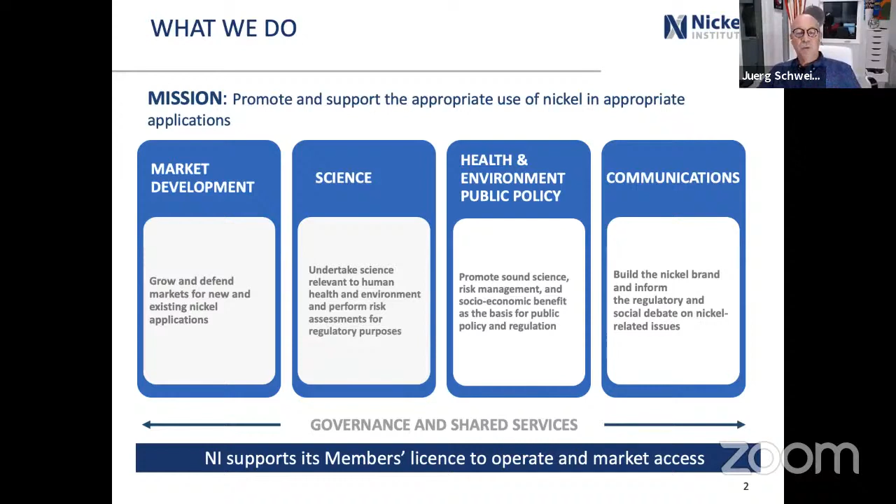At the end, we have the communications team. They are very important to build the nickel brand and to inform the relevant associations and regulators with documents, papers, and brochures, as I will come to as well.

So, where are we located? Our headquarters sits in Toronto, Canada. Then we have the science division, NIPERA, in the US, sitting in Durham, North Carolina. Anything that goes into health, environment, and public policies is located in Brussels, that's the Europe headquarters. Then we have 2 non-profit incorporated offices, in Tokyo and one in China, and 2 representative offices, one in Singapore and one in Brisbane.

Who are our members? As I mentioned in the beginning, these are the leading nickel mining companies. This is who is contributing to the financial parts of the Nickel Institute so that we can do these free of charge webinars, as one you will hear tonight.

Important for everyone, and we've done this for many years, we promote technical help. You go onto our webpage, nickelinstitute.org, and you will immediately see a big yellow box, technical help. You click on it, go through a short registration process, and you can submit any technical questions you have around nickel, stainless steel, and so on. You will get free of charge information within 24, maximum 48 hours back from one of our experts. This is worldwide, take use of it, it would be great for everyone to use.

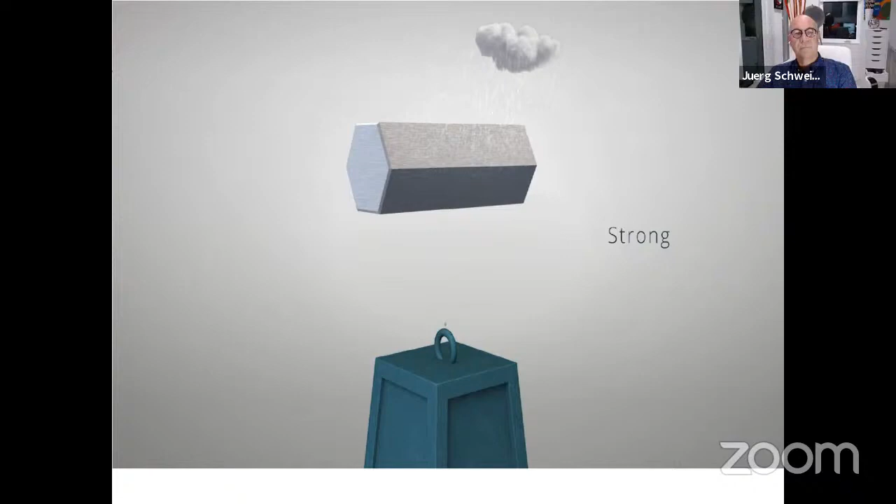For starters, it's the 5th most common element found on our planet. It's produced in more than 25 countries, and it's used in hundreds of thousands of everyday products. Without it, our modern world wouldn't function. But to most people, it's a complete unknown. So what is it that makes this extraordinary metal so special? It's resilient, strong, resistant to corrosion, highly ductile, with a super high melting point. Not to mention its useful magnetic and chemical properties. All in all, a pretty handy element.

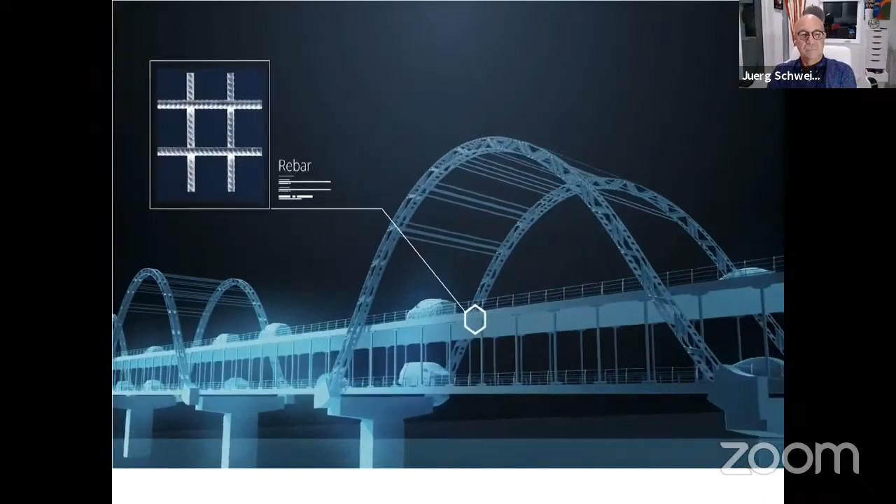But that's not everything. More than two-thirds of nickel produced is used to make stainless steel. This amazing alloy is used in everything from spoons to spaceships. Pretty impressive stuff. Nickel improves the strength of stainless steel and helps it cope with extreme temperatures and corrosive environments, while making it easy to use. It's the perfect partner for engineering and construction projects.

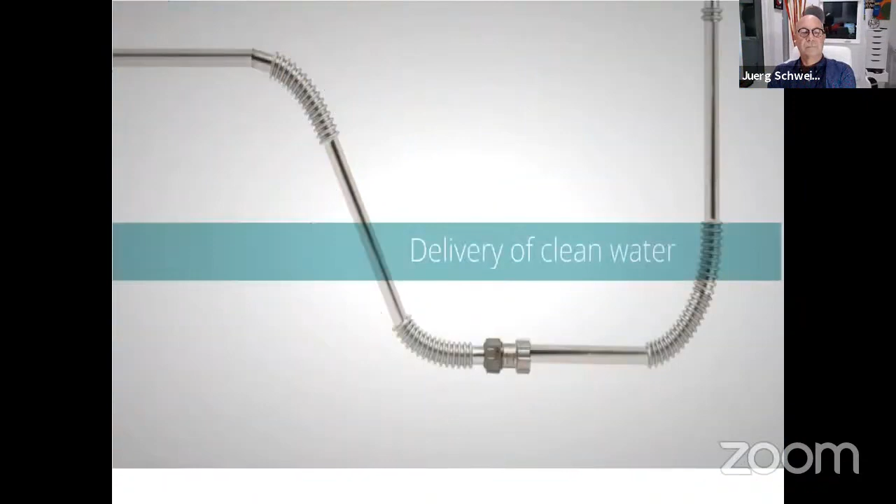The metal is also a key component in modern batteries, enhancing their energy density and helping to power the future of transportation. Nickel-containing materials are used to meet the demanding conditions of the oil and gas industries and other methods of power generation, including renewable energy. And those anti-corrosive properties help provide invaluable protection for a huge range of maritime applications. Nickel helps ensure the delivery of clean water. Being resistant to damage from earthquakes or extreme weather, the lifespan of pipes is extended and leakage is reduced.

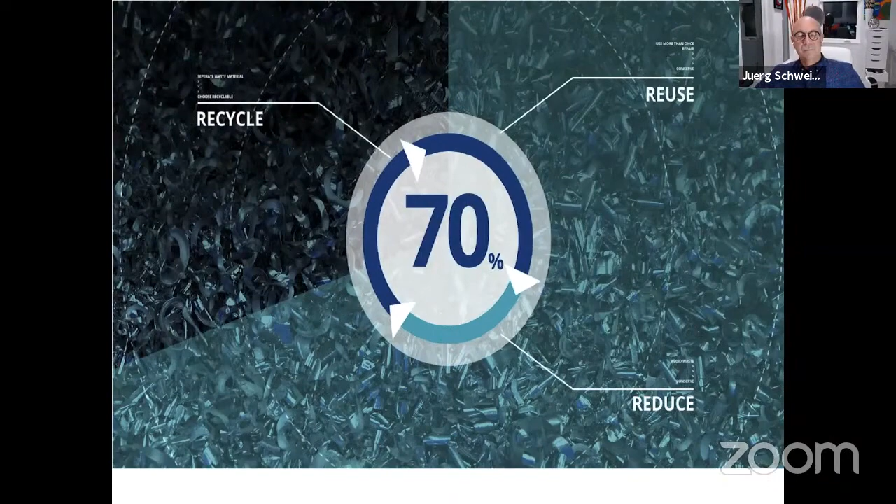And what about recycling? Nickel is one of the most efficient materials for reuse. Almost 70% of nickel is currently recycled again and again, contributing to a sustainable, circular economy. Nickel, the hidden metal that makes the modern world work, now and in the future. Pretty extraordinary, really.

Yeah, hope you enjoyed this short movie.

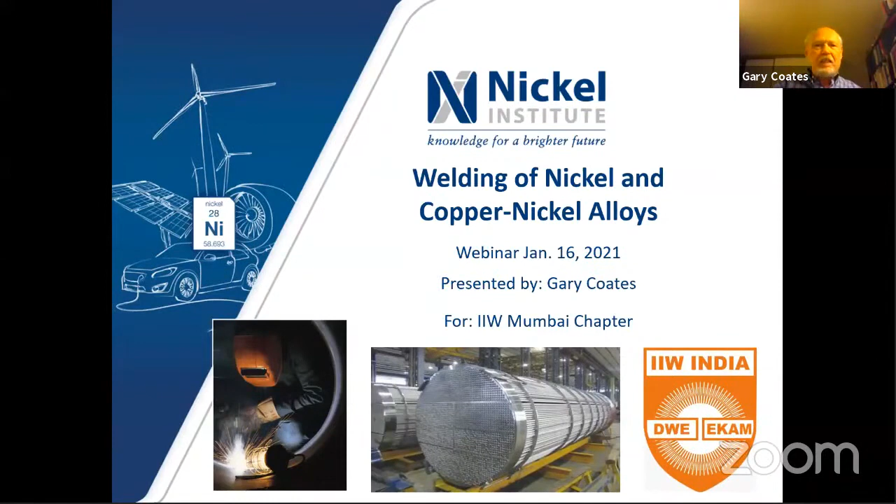Okay, so we're going to talk - I'm going to do a short introduction on nickel and copper nickel alloys, so we're all on the same page related to what kind of materials we're talking about. A section on before you weld, because if you don't have the material right, the welder, the welding engineer isn't going to be able to have it welded properly. And then of course, the bulk of the session is on the welding of these materials. A couple of slides on post-fabrication inspection and cleaning, and we have some very good references that you can look at, and a short summary, and then time for questions.

So one of the issues with nickel alloys is that they are used in conditions that are very severe, highly corrosive, maybe containing toxic, explosive, or flammable chemicals, and especially used at higher temperatures where stainless steels don't work. So we really need to take extra precautions to ensure there's no issues throughout their service life. That's for protection of the people in the plant, people in the surrounding communities, and of course the environment. Now this is not so much true for copper nickel alloys, they're used in more benign situations. We'll come into that shortly, but many of the nickel alloys are used in very severe environments, and they're expensive materials, so we want to do it right the first time.

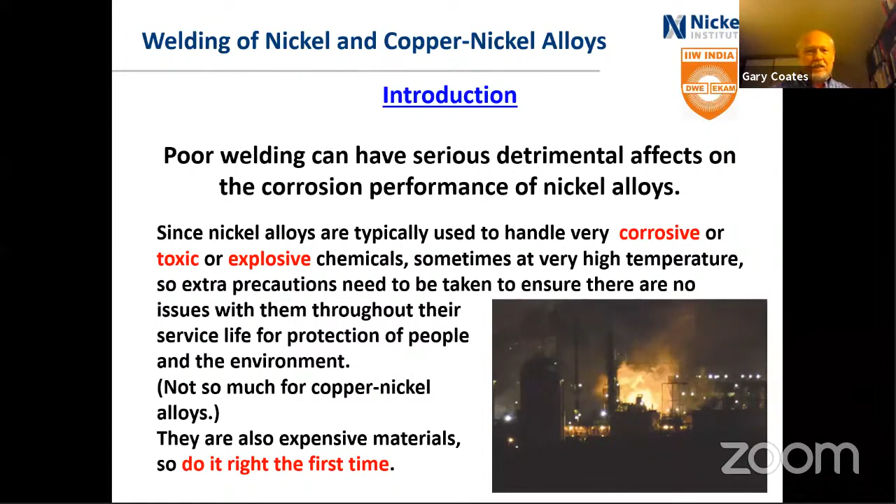So first of all, what is a nickel alloy? It may sound like a not too intelligent question, but the definition has changed. Today, the ASTM definition of a nickel alloy is an alloy with more nickel than any other element. However, previously, the definition was that the iron content of the alloy had to be less than 50%, and more nickel than any other element than iron - that was then called a nickel alloy. The UNS number system followed this earlier definition. Let's take an example of the first one there, the 904L. The UNS number begins with an N because that was considered a nickel alloy earlier. It has 48% iron, 25% nickel.

Previously, ASTM called it a nickel alloy. It was found in the ASTM-B specifications and ASME-SB specifications. But today, ASTM is calling it a stainless steel. Same thing is true for alloy 800. And we think of alloy 800 really as a nickel alloy. It is typically produced by nickel alloy producers. But today, ASTM considers it a stainless steel.

However, an alloy like 825, because there is actually more nickel than there is iron, is still considered to be a nickel alloy.

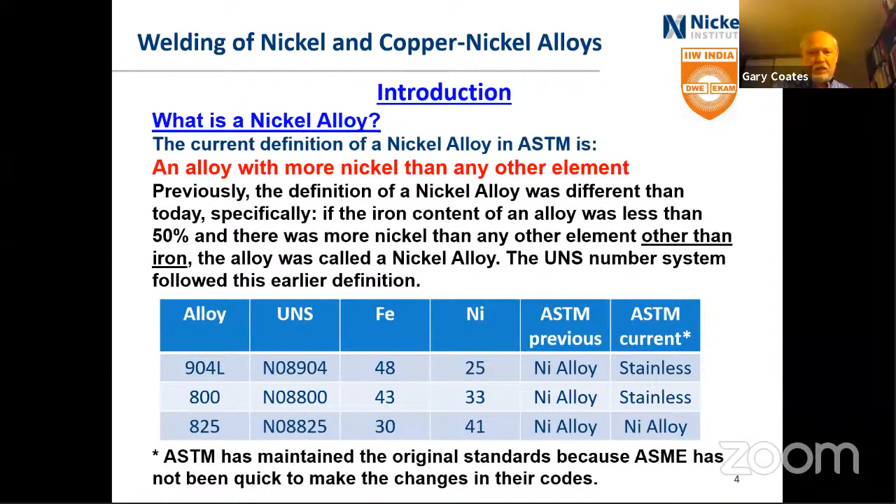So there are two main classifications of nickel alloys, and this is really very important when it comes to using and welding these materials. Many of the nickel alloys contain chromium, just like a stainless steel, and a number of them do not contain any significant chromium content. So for example, the alloy 800, we call nickel chrome iron because there's a fair amount of iron there.

600, we know it often as trade names like Inconel 600, but it's a generic. Alloy 600 is nickel chrome. There's a little bit of iron there, but we call them nickel chrome alloys. Nickel chrome iron molybdenum alloys like 825, and nickel chrome moly alloys such as the 625, and the many types of C alloys.

And just like stainless steels, these grades with the chromium on it form a passive oxide film on the surface. The molybdenum and certain other alloys help to strengthen that passive oxide film. They're suitable in oxidizing to moderately reducing corrosion environments.

The ones that don't contain chromium are alloys like the B family, which are only nickel and molybdenum in it. The nickel copper alloys, we know them as most commonly as Monel 400. Monel is actually a trade name, so alloy 400. And then commercially pure nickel, which is 99% minimum nickel content. Alloy 200 is an example of that.

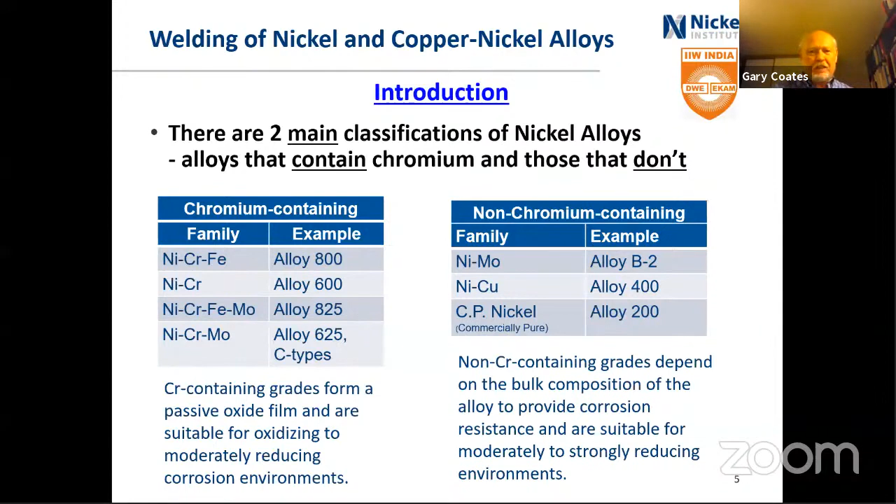Now you might say, well, what is oxidizing and reducing? And I'll come to that very shortly. But I'll just briefly introduce the copper nickel alloys and how they relate to that alloy 400. 90-10 copper nickel is roughly 90 copper, 10 nickel, and 70-30 is 70 copper, 30 nickel there. And they are commonly used alloys in seawater and other chloride salt applications.

Okay, now there is also another family of nickel alloys which are called age hardenable alloys or precipitation hardenable alloys. And they're like the 17-4 pH of the stainless steels. They harden, but through a precipitation mechanism. It isn't a quench and temper kind of hardening operation. You heat it up to a certain temperature, the precipitates form that makes it strong and hard.

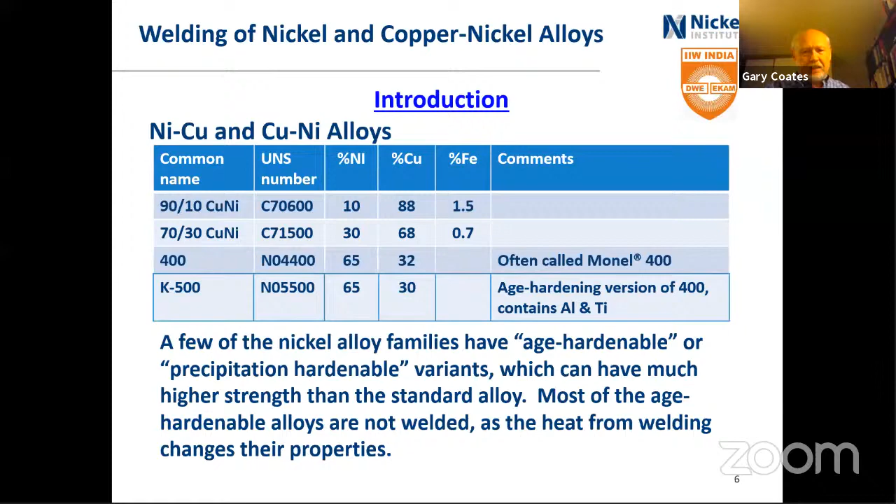Most of them are not welded because the heat from welding changes their properties. The heat affected zone, you heat it up to a temperature where the precipitates dissolve. When they do need to be welded, special precautions need to be taken. I will not be dealing with those alloys here.

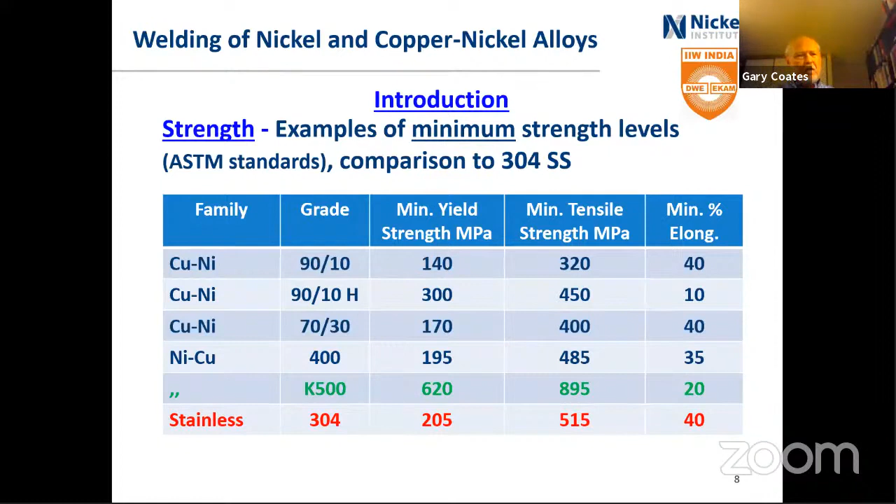Because of that, the elongation, really indicative of the ductility, is lower, still reasonable, but not as good as the annealed materials. Now there is a copper nickel grade, a 90-10 grade, that is work hardening and has a much higher strength. It isn't used a lot, and because it is work hardened to get the higher strength, when you weld it, you're going to affect that property, at least in the heat affected zone. So it is commonly not welded. It is used more for springs and certain other equipment, bar material perhaps.

So I have two slides on corrosion. The idea is that you really should understand where you use these chromium containing nickel alloys versus the non-chromium containing ones.

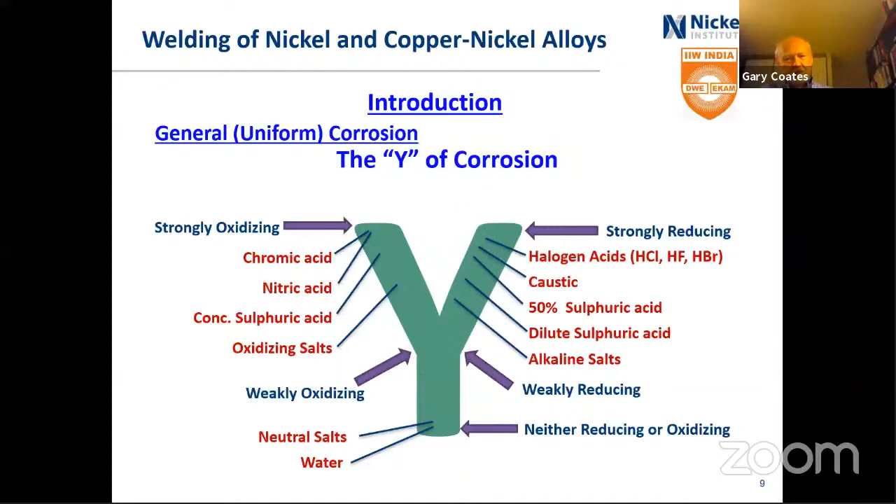So we talked about oxidizing and reducing before. Some of the chemicals that are oxidizing include things like chromic acid, nitric acid, concentrated sulfuric acid, oxidizing salts, as we get weaker in the oxidizing nature. On strongly reducing, we have the halogen acids - hydrochloric, hydrofluoric, hydrobromic - are strongly reducing, caustic, sodium hydroxide, potassium hydroxide, middle concentration sulfuric. And as we get to dilute sulfuric, it's getting weaker on the reducing area, but still reducing there.

And of course, as you can imagine, the chemicals that are strongly oxidizing, you want to have a passive surface film. For stainless steel nickel alloys, you want the chromium in there, but titanium falls into that category too - it forms a titanium oxide protective layer. The stainless steel and nickel alloys that contain chromium do well in strongly oxidizing conditions. In strongly reducing conditions, those alloys don't do very well at all.

Zirconium, the nickel molybdenum B alloys, the pure nickel, the nickel copper alloys, and the copper nickels all work well in reducing conditions.

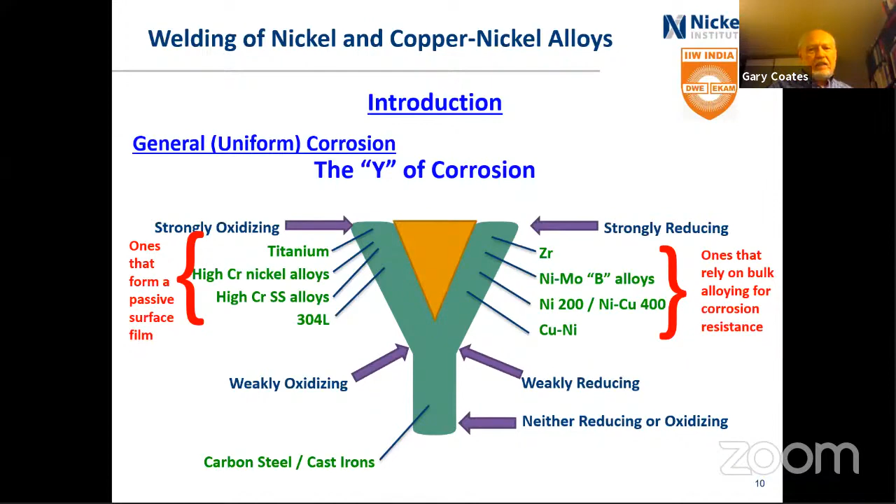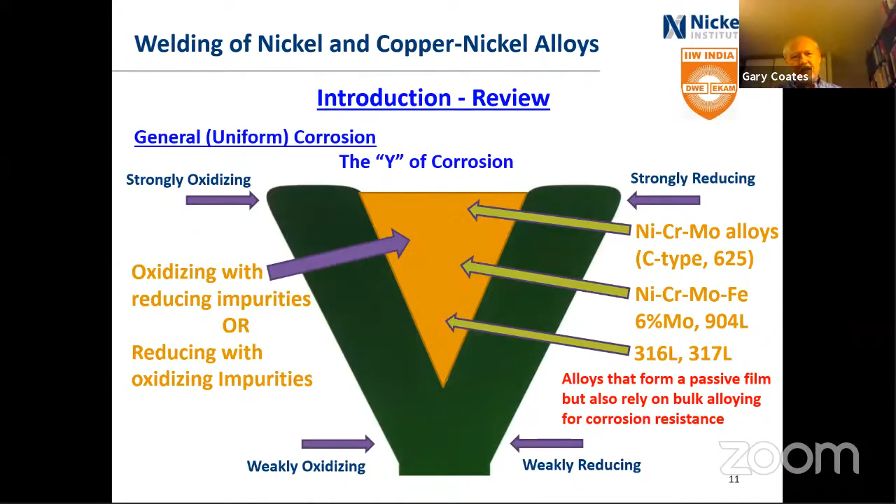Now, in the middle between this Y, the arms of the Y, we have an area that I call the middle ground. It can be oxidizing environments with reducing impurities, or reducing environments with oxidizing impurities. This is where a lot of the nickel alloys fall, things like the C-type alloys, C276, C22, the 625, and we get into the high alloyed stainless steels, 6-moly stainless steels, 904L, which work in slightly lesser conditions, and then 316L, 317L fall into an even lower level, but still they can tolerate some oxidizing conditions. They have that passive film, but they have elements like molybdenum that give it corrosion resistance to reducing conditions.

Now, the next section, before you weld. This is something that is, again, we talk about teamwork. Of course, your purchasing people will probably be the ones actually ordering the material. They will have to know how to order it.

Now, if you're an end user, somebody who's using it, you probably know exactly how it's going to be used, but you may not know exactly how to order it. The purchasing person usually doesn't know so much, but it's the corrosion engineer in the plant, perhaps somebody who's a specialist, who knows exactly what is needed.

So typically, nickel alloys require higher purity alloying additions than stainless steels. So not everybody can easily make them. More important, they often need additional refining - secondary refining, I'll come back to what that exactly means. And unfortunately, the UNS composition doesn't indicate anything about it. Even ASTM, ASME specifications do not make it clear whether secondary refining should be mandatory or not, and they don't even talk about the primary refining in any degree.

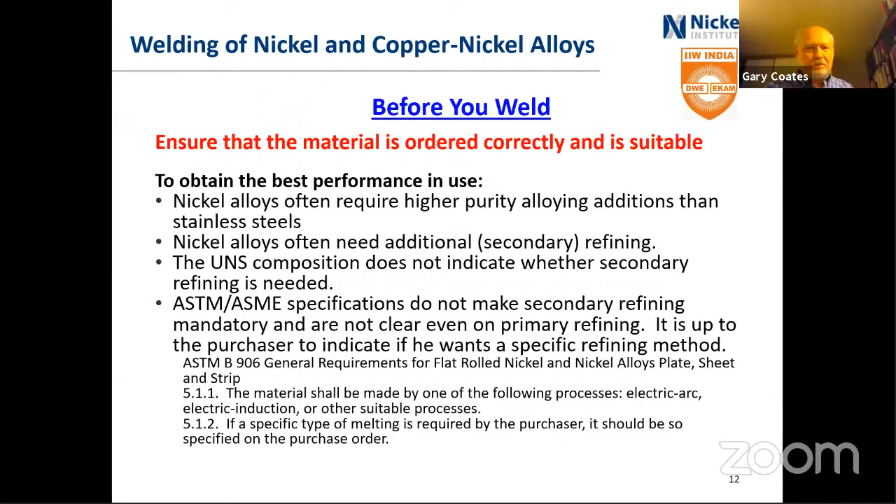So what is primary refining? Well, electric arc furnace is typically where you melt the material - you take the raw elements and melt them in the electric arc furnace. A foundry, somebody who does castings, typically only has an electric arc furnace. There's a few that do have other refining methods, the AOD and VOD, but most of them only have an electric arc furnace, and it can only do a little refining. You really need high quality ingredients if you don't have any other refining other than the electric arc furnace.

Most nickel alloy producers will have AOD - that's the same thing that 90% of the stainless steel producers have, argon oxygen decarburization, very efficient in refining, cleaning up the material. Or a few people have vacuum oxygen decarburization, which does the same thing as the AOD, but with slightly different methods.

Secondary methods of refining, once you've done the primary refining, are electroslag remelting, vacuum induction melting, and vacuum arc remelting. The latter two methods are more typically used on aerospace alloys rather than corrosion-resistant alloys. The vast majority of them are secondarily refined in the electroslag ESR machine.

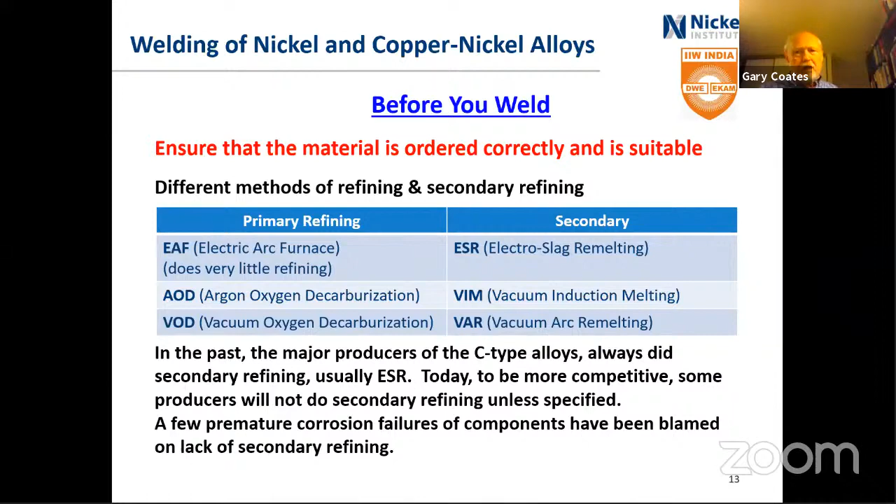On top of that, we do want to make sure the material is in the best possible condition. Again, the ASTM specification, if you just order it to the standard for plate, doesn't require any sort of acceptance test. So many chemical producers, like Dow and BASF, will specify an acceptance test for the material. The acceptance test for C types and 625, for example, is a G28A test to be done. However, there is no acceptance criteria given in that ASTM spec, so the end user really has to come up with their own criteria.

MTI, the Materials Technology Institute of the chemical process industry, has had one project and we're in the middle of a second project to define typical values for good quality materials of C type. They already did the 625 type. So that acceptance criteria is really critical there. There is some information on the internet about that, and values are given there.

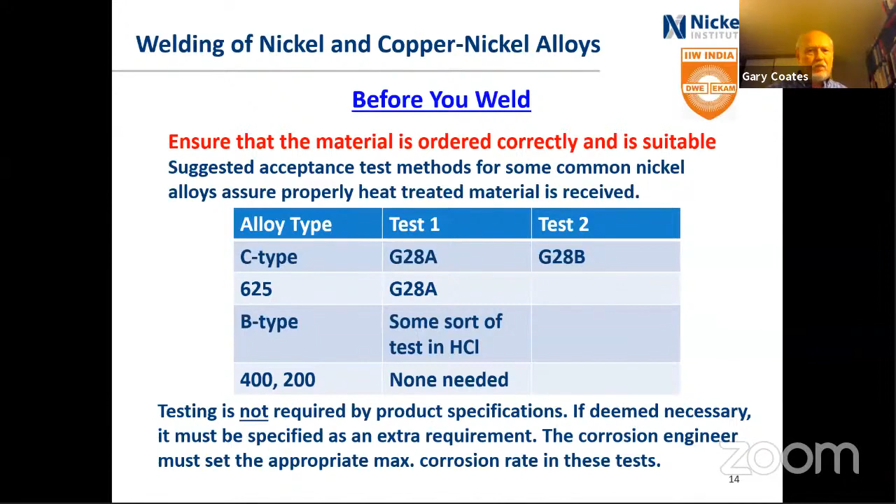Some of us like micrographs with bad phases in there. I'll show you a picture of C276 and B alloy that have been badly heat treated and have lots of grain boundary precipitates. It's not carbides there—there may be some carbides, but there are other phases. It's mu phase for the C alloy and a nickel molybdenum phase for the B alloy.

But if you don't require an acceptance test for the material and you order it from the cheapest source, you may end up with badly heat treated material. And then if you go to weld it, you will do a very bad job on welding. Physically, it will look good, but it will actually corrode very rapidly in service.

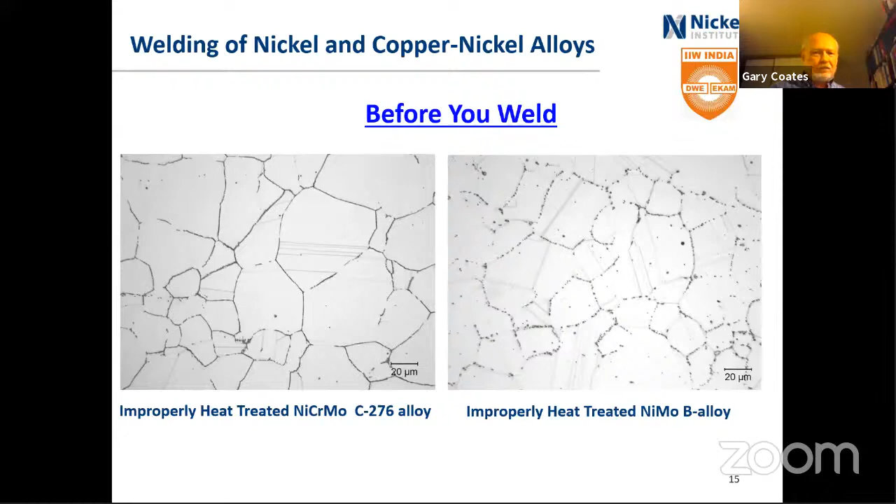One slide just about storage and handling. Most of us talk about stainless steels being handled properly—cleanliness, storage of material indoors, protected from contact with carbon steel, protected from surface damage, scrapes, dents, gouges, etc. It is even more important for nickel alloys. You have to think of these as very expensive materials—treat them very carefully, differently than you do carbon steel or even stainless steels.

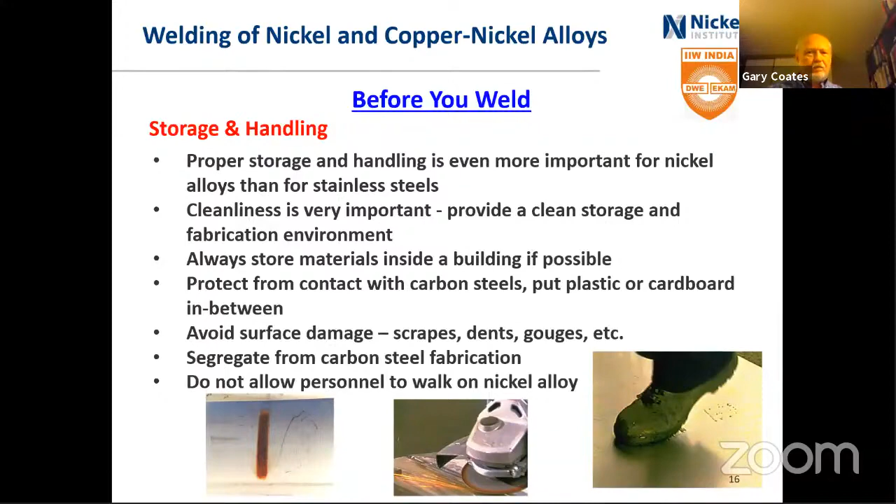There are a lot of similarities between welding of the austenitic stainless steels and the nickel alloys. In a way, the nickel alloys are all austenitic alloys, just like the 300 series stainless steel. So there's no need to preheat or do post-weld heat treatment. There's a need for cleanliness, even greater for the nickel alloys, and reduced weld metal penetration—I'll come to that shortly.

The weld pool is viscous—it doesn't move, it doesn't flow easily, and that's just a natural characteristic of the material that the welder has to live with. We'll get into that shortly too. The thermal expansion coefficient of nickel alloys is less than 304, so slightly higher than carbon steel. So distortion is no worse a problem on nickel alloys than it is on 304. You can treat them about the same, even though the thermal expansion coefficient is actually less there.

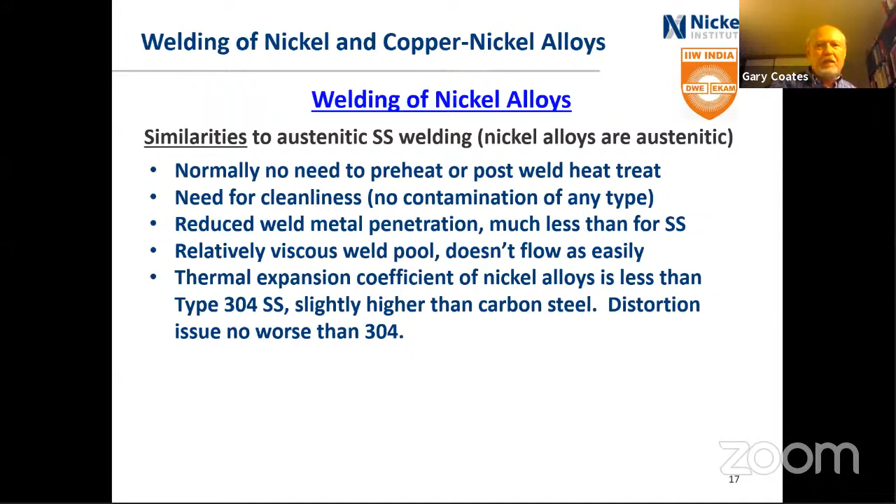When it comes to weld joint design, we understand that the higher the nickel content, the less weld penetration you are going to get. That's a natural characteristic of the material. I'm showing a mild steel here run, and then 304, the same current amperage, and you get less depth of penetration. And then an Inconel 600, which has 60% nickel, that's even lower penetration. So if the welder were just to look at it, he's going to try to compensate by turning up the current on the machine, and that's a bad idea.

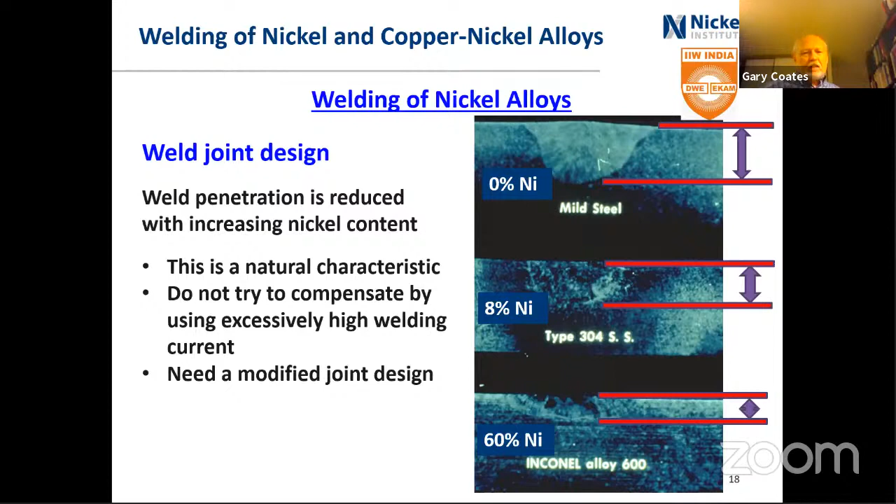That's not going to help. You need to modify the joint design. So just like stainless steels, it's a matter of opening up the bevel, making sure there's a wider root opening in the base if you're welding from one side, and a smaller root face. That's true for the high alloyed stainless steels and the nickel alloys.

Now, machine joints are preferred on thicker plates to hand grinding. Grinding, whether it's stainless steel or nickel alloys, is not a great job. It's hard to do, hard to control, so you get a uniform joint preparation. For the welder's sake, because these are expensive materials and a little more tricky to weld, you really should have as uniform a weld joint as possible, and that's often done through machining of the material rather than hand grinding.

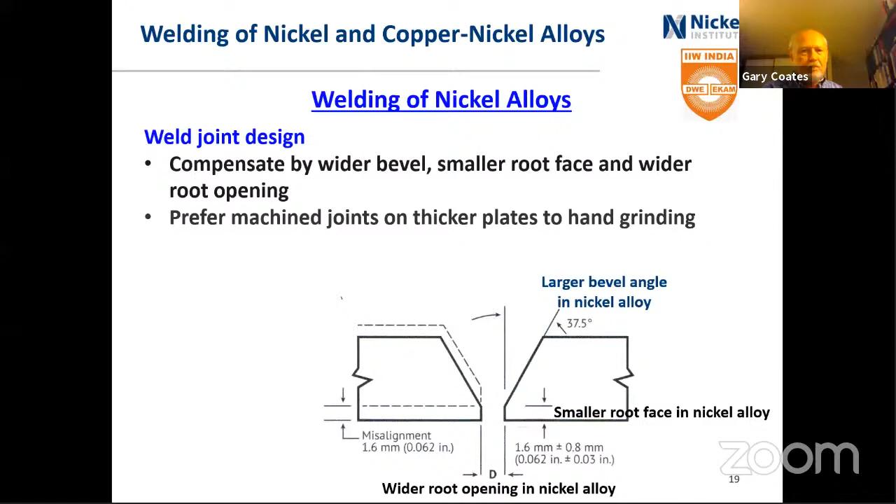So we mentioned that preheating is not normally required, but in environments where there's high humidity and you want to remove any moisture contamination, sometimes people will take an oxyacetylene torch and just warm up the material so that it's warmer than the ambient air temperature, and you have no condensation on the material.

Typical heat inputs for most of the nickel alloys are lower than the standard 300 series stainless steels, more like the 6% molybdenum stainless steels. The nickel alloys are fully austenitic. The filler metals are fully austenitic, and hot cracking can result if you have too high heat inputs. We'll come back to that shortly when we talk about processes too.

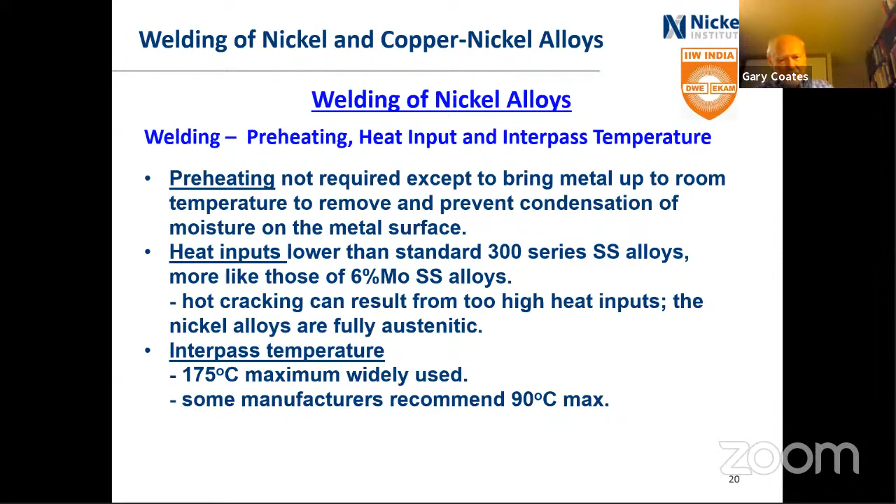The interpass temperature, some people say 175 Celsius as an interpass temperature for most alloys. Others are more conservative and say 90 degrees C. And I've always favored the lower number, because if you say 175, the welder, chances are he's going to say, well, that's close enough, I don't need to worry about it, and maybe it's 250. So we usually like to say 90 or 100 degrees C maximum interpass temperature.

Cleaning, we said, is important, and sulfur or carbon can reduce the corrosion resistance if they're in the weld joint or beside the weld. Low melting point metals from marking crayons, lead, zinc, etc., left on the surface can cause cracking. Contact with galvanized steel is another example of that.

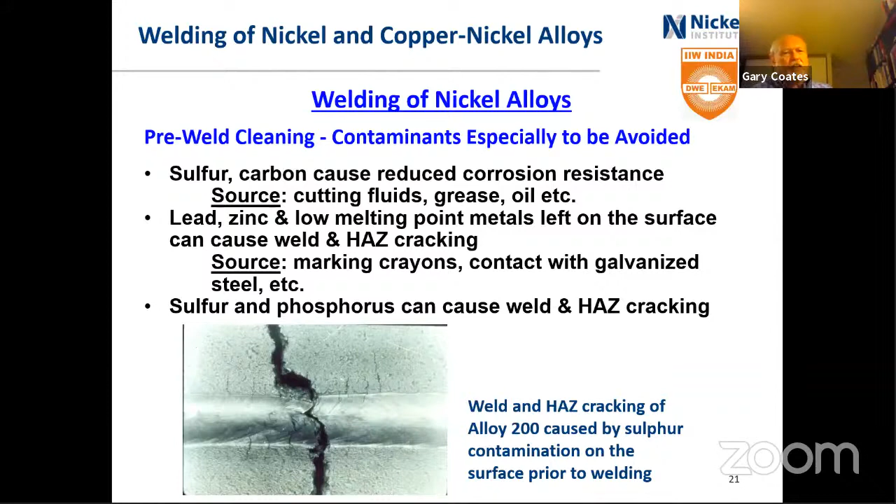And the picture is a very famous one. It's probably about 60 years old now, but it is of an alloy 200 which had sulfur contamination on the surface prior to welding, and it caused cracking. The sulfur goes along the grain boundaries and just spreads like crazy, almost like a liquid metal embrittlement situation there. But anyhow, it's very serious. So cleanliness is very important for all the nickel alloys.

When we come to welding processes, many of the same processes used on austenitic stainless steel are suitable for nickel alloys. Gas tungsten arc welding, or TIG welding, is commonly used, especially for root passes. The shielding gas is pure argon, usually for manual welding. The backing gas would also normally be pure argon. Argon-helium is used for automatic welding, where you can get higher speeds in a consistent manner.

Most often, TIG welding is done with filler metal. You really would like to ensure you're adding filler metal there. Of course, if you have very thin material, that may not be possible. But for any sort of thicker material, we would really like to have filler metal added for corrosion resistance and for hot cracking resistance.

Presence of oxygen, carbon dioxide, nitrogen, and moisture can cause porosity, especially in the non-chromium containing alloys. We'll come back to that in a minute when we look at the copper-nickel alloys too, but even keep it as low as possible for the chromium containing alloys. And if you see porosity in a weld, look for sources of oxygen, carbon dioxide, nitrogen, or moisture in the welding process.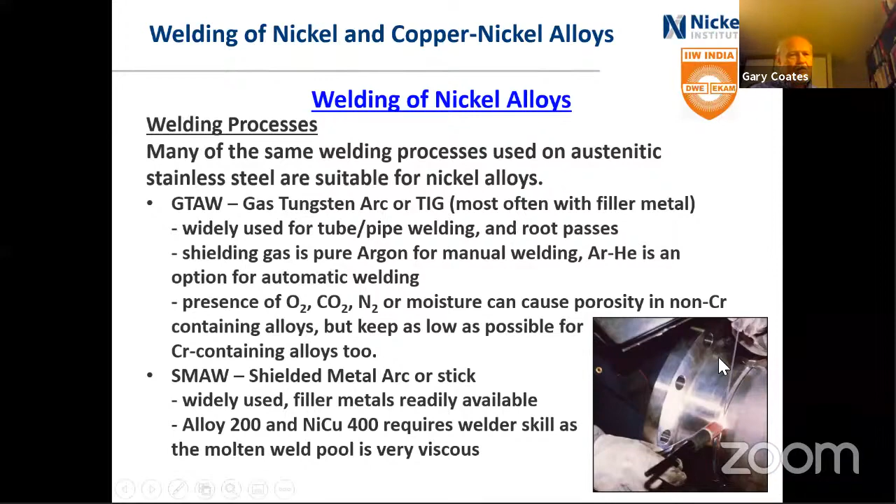Gas metal arc welding is commonly used when you have a lot of many meters of welds to do. It does take sometimes longer time to find the correct parameters for many of the nickel alloys, so there's a lot of setup time and practice time. That all costs money to do. But if you have a big job to do, it's the way to go.

Submerged arc welding is used, but not commonly. It's a high heat input process, and you really have to run it at a relatively low heat input for it to work. For most of the alloys, it requires very special fluxes, and those are expensive. A lot of people don't want to buy the expensive fluxes, so they use a standard flux meant for stainless steel, and then they run into hot cracking problems. In the end, it would have been much better for them to buy the expensive flux and get it right the first time. Flux cored arc welding and metal core arc welding have limited availability of filler metals.

There are some quality issues still with these filler metals. They tend to be very expensive, but they're being developed now and are getting better. They're especially useful where you want to use gas metal arc welding but, because of windy conditions or other reasons when welding outdoors, they can be a good way of ensuring a good quality weld.

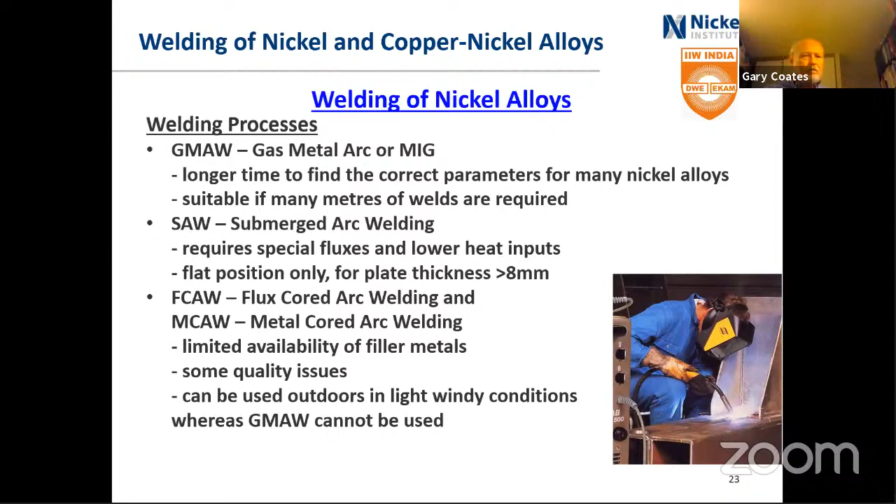I'm going to get now more into some specific alloys and specific conditions here. I'm not going to talk a lot about the high temperature alloys, I just have one slide about it. They're used because of their high temperature strength and their resistance to the environment. It can be different environments, and different alloys are used depending on whether it's oxidation versus carburization, nitridation, or sulfidation. All of that needs to be considered when selecting the filler metal.

You want filler metals to have the right strength at the high temperature, and you want them to have the right resistance to the environment. One of the things that is different with high temperature alloys, whether it's stainless or nickel alloys, is that the metallurgical structure of the material can change with time. Most often that means they embrittle with time. Now, they take a much longer time to embrittle, but if you have a material that's been in service for 5 years, it might be quite brittle.

They embrittle because of intermetallic phases, but also the grain size will grow. When you have large grain sizes, all the impurities in the material go to the grain boundaries, and it makes it very easy for the grain boundaries, when under high stresses, to separate. So sometimes repair welding is very challenging, and sometimes it is impossible. Such a topic on the high temperature alloys is really the subject of a separate webinar.

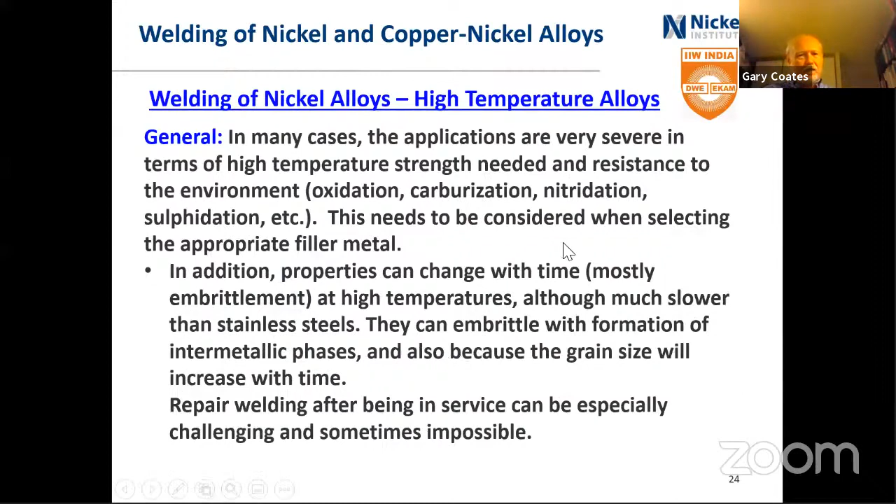Okay, so when we talk about the corrosion resistant alloys, we typically break them, for convenience and for welding purposes, into 3 groups. Group A is the nickel and nickel copper alloys, and I will include the copper nickel alloys with that group too. The chromium bearing ones all have a certain similarity, we call them group B, and then the nickel molybdenum alloys are group C. This only relates, I have to emphasize, to welding discussions, it doesn't relate to corrosion resistance. There are huge differences in corrosion resistance within the same group.

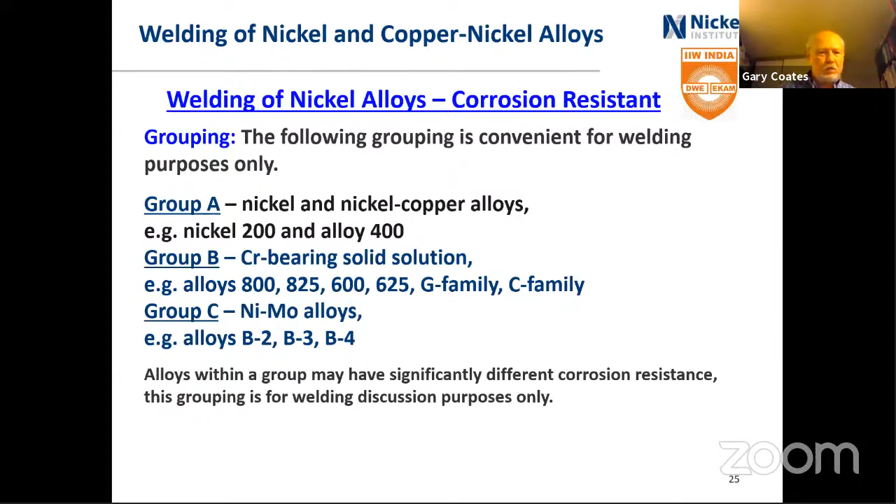So when we talk about commercially pure nickel, when it comes to the base metal, there are 2 different types. There's the 200 alloy, which has a relatively high carbon content, and the 201, which has a low carbon content. The 201 base metal is used where the service goes above 315 degrees C, because the carbon will get together and form essentially graphite at the grain boundaries, and that's a problem with end use. It corrodes rapidly there. However, the filler metals are not subject to graphitization, so there's really only one type of filler metal used for both 200 and 201.

The carbon in the nickel alloy is there to give it a little bit higher strength. We saw earlier it's a very weak alloy, so trying to get a little higher strength out of it, it typically will have a higher carbon level.

The AWS classifications for the stick electrode and bare wire are given there. As I noted before, welders will note a very sluggish nature to the weld metal. It takes time to weld. You've got to do it slowly to get a half decent appearance on it.

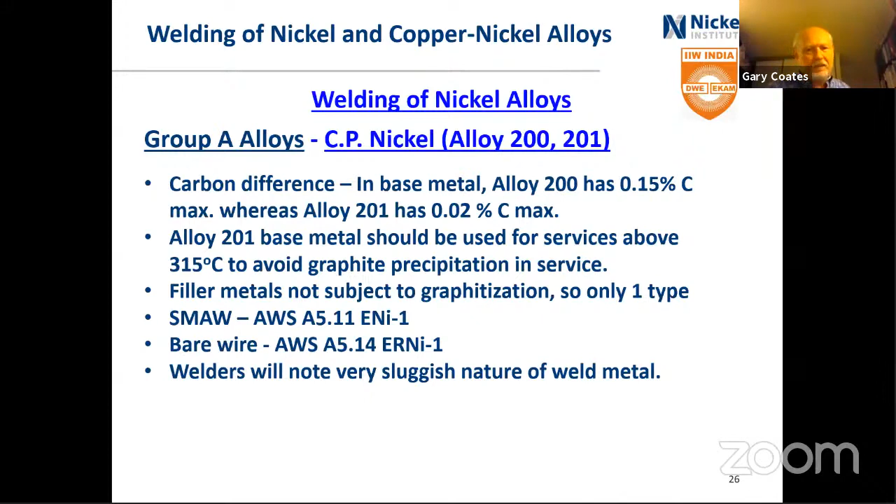The other major group A alloy is the nickel copper alloy, the Monel 400 type, and it's a little more welder friendly than commercially pure nickel alloy. It welds reasonably well with the bare wire, not so well with the coated electrode, but they've improved that a fair amount too. The matching filler metal, E nickel copper 7 or ER nickel copper 7, is available, and you might think that's the one that is used, but in salt or brine environments, the matching filler metals may be anodic to the base material, and you might suffer galvanic corrosion.

For those who know a little about galvanic corrosion, the worst possible case is to have a small area of material that's anodic, which corrodes preferentially to the larger area of cathodic material that doesn't corrode. When you have a weld on a piece, that is the small area, so you definitely don't want that. Typically there are two filler metals listed. The second one is the 625 type filler metal, nickel chrome moly 3, and it is often used for welding the Monel 400 type materials in salt or brine environments.

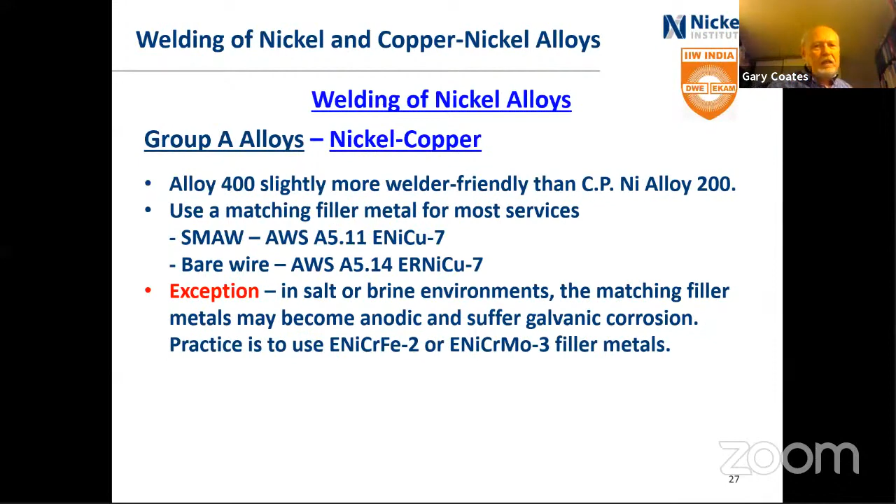I'm now going to move on to the copper nickel alloys, since that was specifically requested, and they are somewhat different from even the nickel copper alloy, the Monel 400. The copper nickel alloys have a thermal expansion rate closer to 304, so they're higher than most of the nickel alloys, and therefore more prone to distortion than the nickel alloys.

So you want to keep the number of tacks to keep it straight similar to what you might use on a 304 material. And of course, it's very important to clean the tack welds of any surface oxide or other contamination after tacking.

Most of the copper alloys have, as you can imagine, a higher thermal conductivity. They suck away the heat better. The 90-10 copper nickel has a thermal conductivity maybe 4.5 times that of 304, so you have to be aware of that. The weld metal will cool faster than it would on a stainless steel. For the 70-30 copper nickel, it's 2 times that of 304.

And it's almost identical to the alloy 400 there, so still better than stainless steel, but not as good as the 90-10. Again, the weld pool will cool faster than with stainless steel, but not as fast as the 90-10. An interesting fact I hadn't noted before is that carbon steel has a higher thermal conductivity than the 70-30 copper nickel. It also sucks away the heat from the weld zone. Like the nickel alloys and stainless steels, no preheat or post-weld heat treatment is needed.

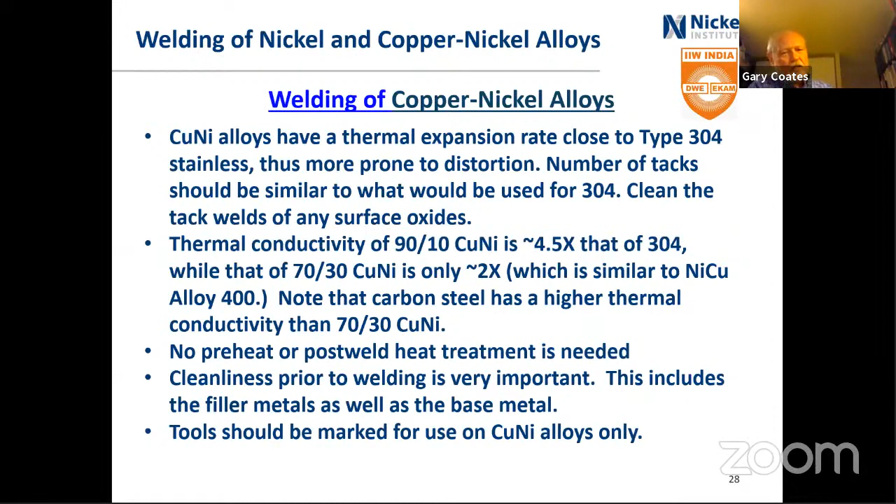Tools that you work with should be marked for use on copper nickel alloys only. So if you have a tool that's been used on stainless steel previously, you can use it on copper nickel alloys, but once it's used on copper nickel alloys, you don't want to use it on stainless steel. Copper is a bad actor on a lot of the stainless steels, so the best way is to have tools marked for use with copper nickel alloys only.

So for the 90-10 filler metals, there are some available on the market, but they're not actually ones normally used. There is, for example, no AWS specification for a matching 90-10 filler metal. So most 90-10 and 70-30 are welded with a 70-30 type filler metal, or occasionally, as we'll cover in the next slide, with the Monel type nickel copper filler metal. These filler metals contain a small amount of titanium to react with oxygen and nitrogen to prevent porosity.

However, titanium in the filler metal, especially with the stick electrode, makes welding more difficult or ugly. There was a question about titanium in these materials - sometimes there isn't enough and you get porosity, so it's a bit of a problem. You don't want too much in there because you get really ugly welds, but you don't want too little or you get porosity.

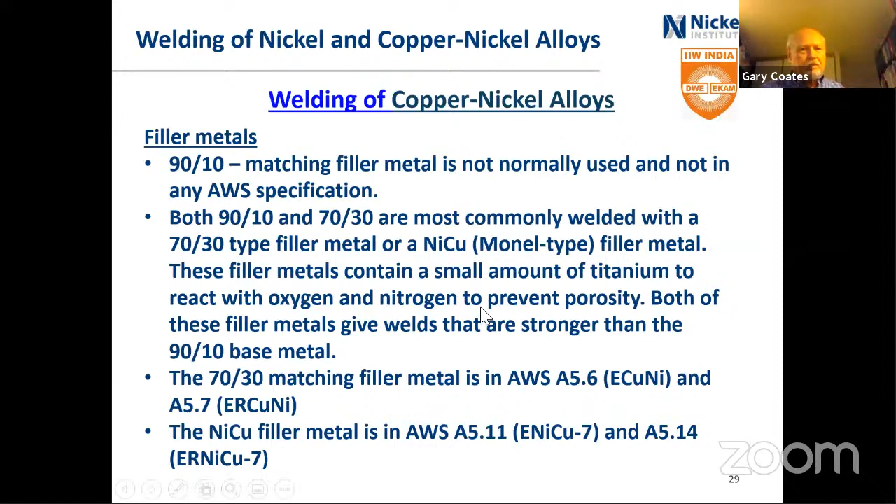So for TIG welding, use filler metal wherever possible. Obviously if you're dealing with 1 millimeter thick material it may not be easy to use filler metal, may not be required, but in most cases use filler metal, pure argon.

Some people will add a little bit of hydrogen to the shielding gas. The hydrogen is there to take out any oxygen or carbon dioxide which might break down during the welding in the arc. That's not a problem for the copper nickel alloys to do. You don't want to use it in a lot of other materials, but it's okay for the copper nickel alloys.

Use a short arc and a gas lens. Most people are familiar with a gas lens - it's just a little screen on the TIG torch, also called a diffuser, that causes the gas to not be as turbulent as it would be without that.

With shielded metal arc, it's important to remove all slag between the passes, avoid start-stop defects, and if they occur, grind them out and re-weld if necessary. In general, welds will not be smooth.

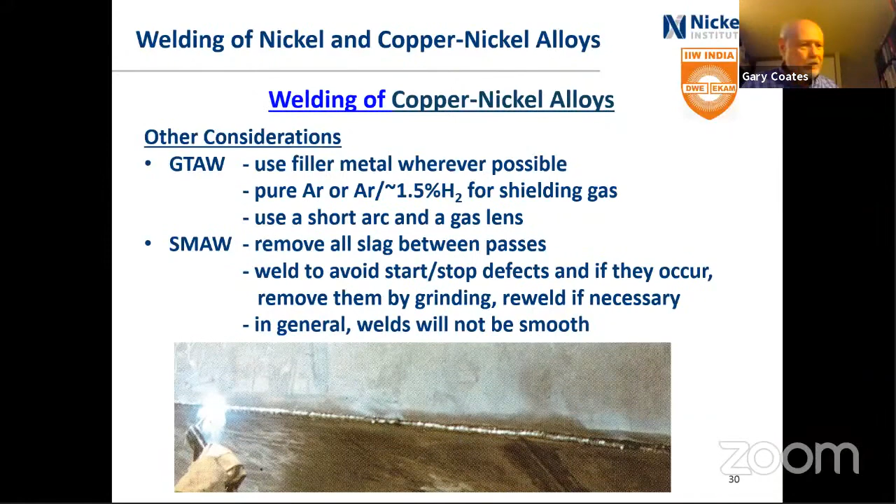Gas metal arc welding of the copper nickel alloys - all three processes are possible. Typically argon or argon-helium gas mixtures are used.

When it comes to clad material, because copper nickel alloys are fairly soft, a lot of the times you're cladding it - you're either putting sheet on carbon steel or you have an integrally clad material, whether explosive clad or roll clad. Special welding conditions have to be done because the high copper alloys have a very low solubility for iron. So if you get some contamination of the carbon steel into a copper nickel weld, you have problems there. You have to make sure you are not getting carbon steel into the weld where you're using the copper nickel filler metal. Sometimes the nickel copper filler metals, where the nickel has a much higher solubility for iron, are used in that joint where you're attaching the two together, where you will get carbon steel pickup.

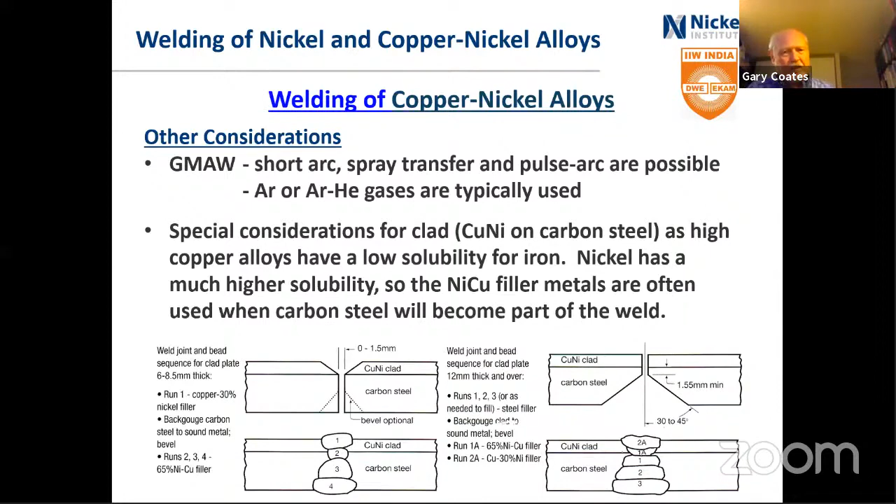Just one final consideration about copper nickel alloys. Copper nickel is used to avoid fouling - marine organisms attach themselves onto the piece. Copper is a poison to the marine organisms, so they don't adhere, or don't adhere tightly to the metal. The higher the copper content, the more fouling resistant the material will be.

In general, we found that the 70-30 copper nickel is very good, not as good as the 90-10. So when you do a weld with the 70-30 copper nickel, it is still quite resistant to this fouling. But if you use the nickel copper alloy, which has only 30% copper in it, it is less resistant, so you will get the marine organisms attaching themselves. So when using it in live seawater like this, you want to avoid having that nickel copper alloy, the 400 alloy, as the final weld pass seeing the seawater.

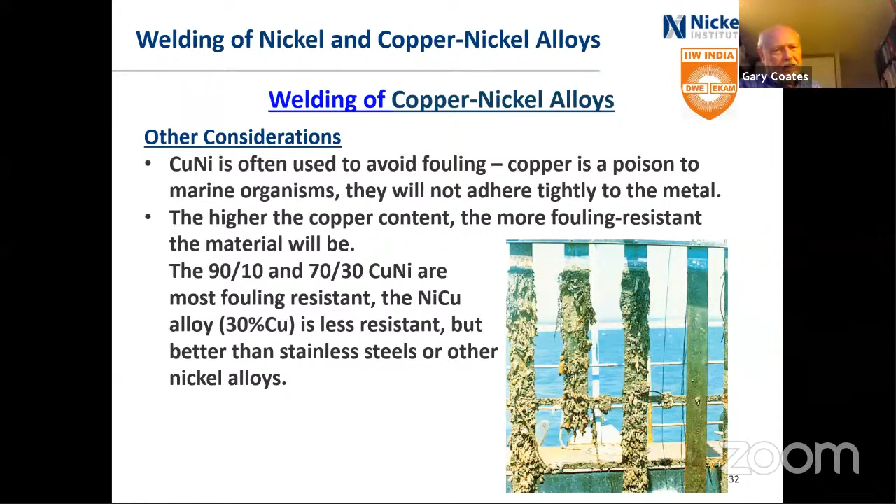So moving on to the nickel alloys, the group B ones, the nickel chrome iron 800 is a common alloy. It is used both for corrosion resistant services and high temperature. For corrosion resistant service, you typically use a nickel chrome iron 2 or nickel chrome 3 filler metal. If you want a little bit higher strength, you can use one that contains some cobalt and molybdenum.

Their high temperature service is sometimes very tricky because it depends on how it's used in the high temperature. There's different variations of the grade 800H, 800HT, but most often the filler metals used are the same as for alloy 600, which is the next slide here.

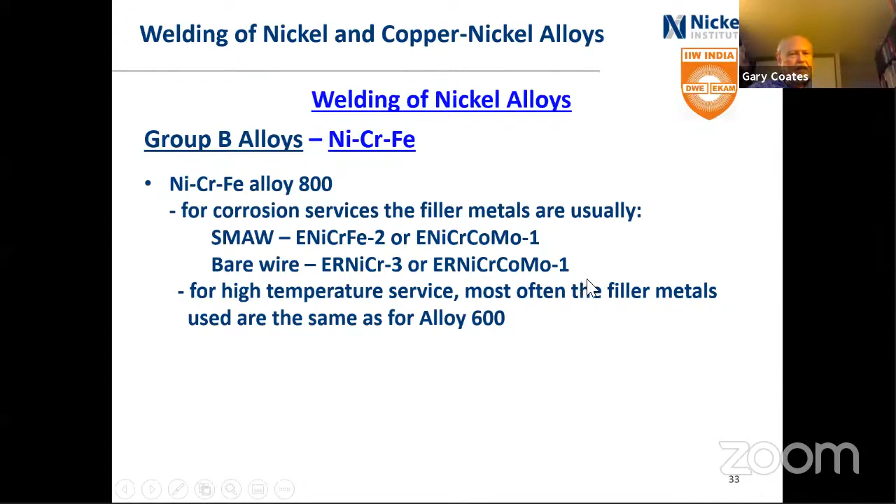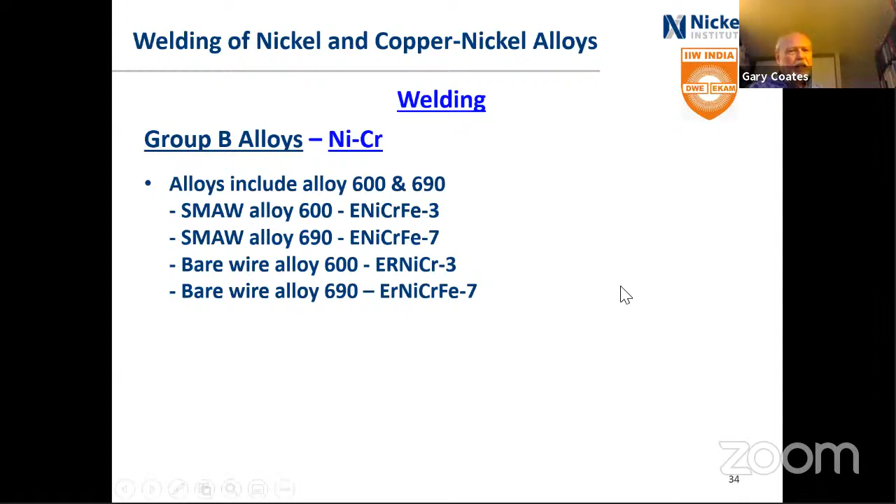The 600 is the shielded metal arc nickel chrome iron 3, and the bare wire is ER nickel chrome 3, and they are high nickel filler metals. Now there are a lot of other variations, 601, 602CA, and all those are so different from the 600 that they do require special filler metals for high temperature service. I'm not getting into that here - I'm only concentrating on the corrosion resisting alloys.

So when we come into the nickel chrome molybdenum and the nickel chrome iron molybdenum, which are like the 625, 825 C type alloys, there is a lot of different variations of them. If you think of the 6 molybdenum stainless steels, the 254 SMO, AL6XN materials, you're really worried about the microsegregation of molybdenum, which is why they are welded with a high nickel filler metal. Well, when we get to the high nickel alloys, such as 625 and the C alloys, that's not a major problem.

And typically we do use more matching filler metals. The exception to that is the 825, which is almost always welded with a 625 filler metal. There is a matching 825 one, but it is not commonly used. It's more used where you know that there's a problem with high nickel, and there are a few cases in fuel cells and things like that where high nickel can be a problem.

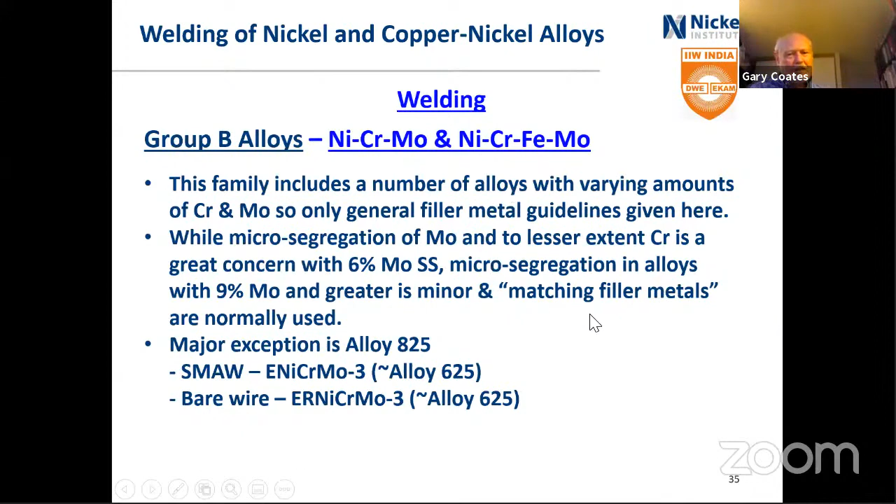If we move into the ones more commonly used in the chemical industry, the C-type alloys, here I'm showing the chrome and molybdenum, the major alloying contents other than nickel. The 625 had 9% molybdenum in it, which has a fair amount of corrosion resistance. The C alloys typically either have higher chromium or molybdenum, so the C22, 622 alloy has 4% more molybdenum than 625, so far more corrosion resistance.

The older C276 had a lower chromium content, but really high molybdenum content, so it's used in strongly reducing conditions. And then the other C-type alloys like 59, the VDM version, 686 special metals, and 2000, a newer Haynes one, has both the high chromium and the high molybdenum. So you can just think that if you're welding

625, you can easily use from a corrosion point of view a C22 or a 622 filler metal there strictly for corrosion resistance. Now it's a bit complicated because 625 is also used for high temperature applications, and there, of course, it's a completely different situation. But let's say you have a C22 base material - you can weld it with the matching one, the C22 or 622, or you can go to a 59, 686, 2000 type filler metal because you know that the molybdenum content is higher and the chromium content may or may not be higher, but it's more corrosion resistant.

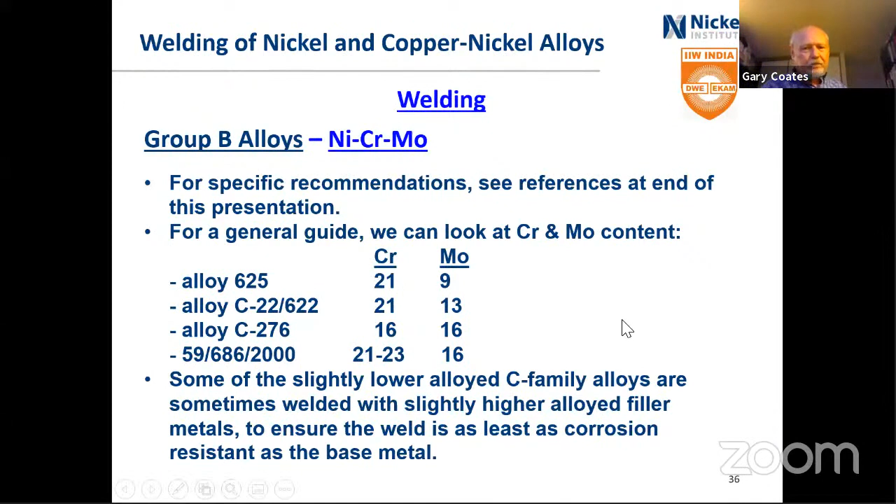The final group is the group C alloys, which are the nickel molybdenum B alloys there. And the two common alloys are B2 and B3. B2, they've done a controlled chemistry version of it, which all the major producers follow these days - maybe not all the producers in the world of the alloy, there aren't all that many, to be honest. And so the original earlier B2 version had problems that the B2 controlled chemistry has overcome.

There are different filler metals available, the B3 and B4. B4 was a version that was made by VDM to get around the Haynes patent on their B3, but they've stopped making B4 now and are only making B3. I'm not sure about the availability of the B4 filler metal now. I know the wrought material, the plate, is not available now.

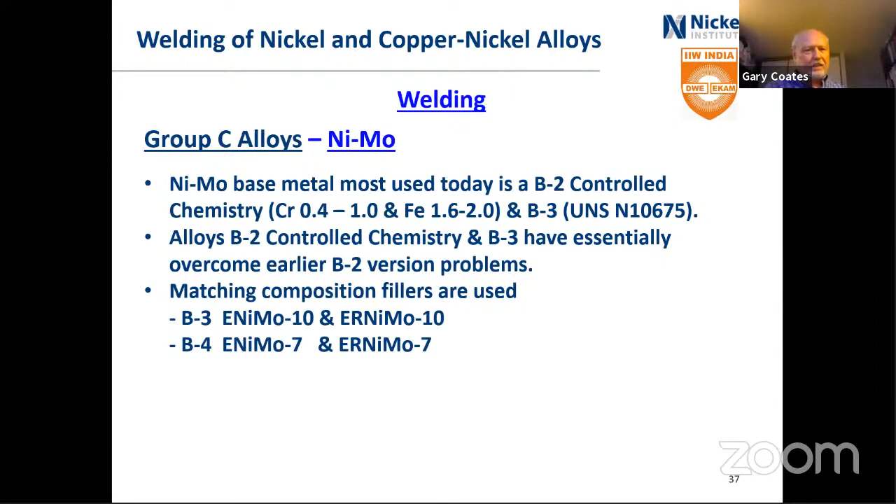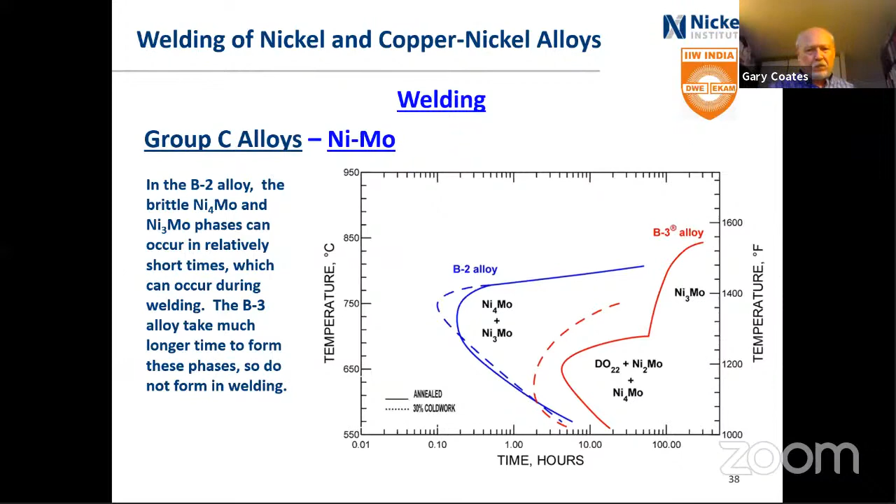Some of us love phase diagrams here, and this really just shows that the B2 alloy, you can get some brittle nickel molybdenum phases occurring in relatively short times - 6 minutes. Hopefully, during most welding operations, you won't be getting 6 minutes at 750 degrees C, but it is something to consider if you're doing any heat treatment on it, or if you need to do a lot of repair welding on it, where the B3 alloy takes much longer time to form these phases - so really impossible to form during welding.

I don't want to talk a lot about dissimilar metal welds, but often there are multiple choices of filler metals available that you can use for them. You have to really look at what the two different metals are, what the tolerance for the metals are. We saw that with the copper, high copper alloys, they didn't have a tolerance for iron. Some of like the B alloy with the high molybdenum doesn't have a tolerance for other things. So you really have to look at the particular combination. In general, they are relatively easy to weld with each other.

And you really do want to use a filler metal there, because the filler metal is that combination of part base material, part of each of the base materials, maybe 15% of each, and then the rest is the filler metal composition. And for consistent quality, you do want to add a consistent amount of filler metal. So that's a welder skill that he has to learn, but it also involves doing the setup, the joint prep, and that sort of thing, so that it is all controlled carefully.

And often the shielded metal arc is the preferred process for dissimilar metal welds, only because the welder can easily control the parameters there. TIG welding, it is difficult to use that.

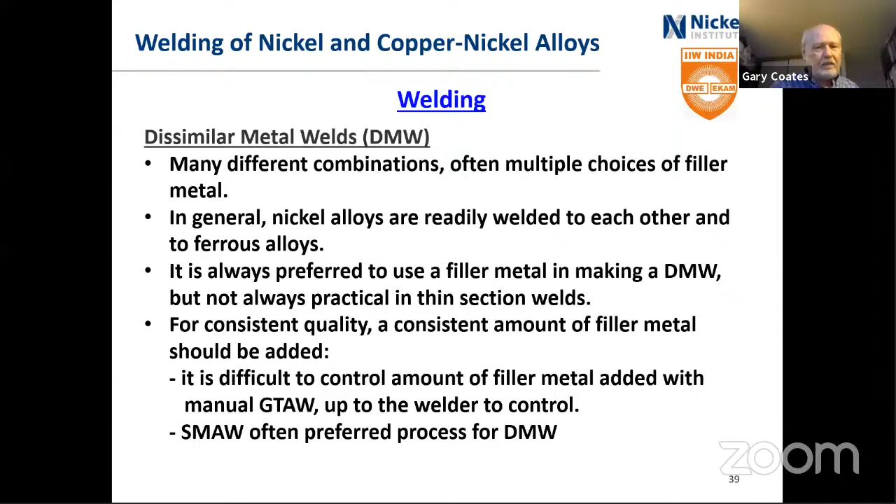Just a few words on post-fabrication inspection and cleaning. As we can imagine, with anything that's being used in severe corrosion services, you do have to look and inspect the welds carefully for any kind of defects, which may impair its function in service. They're the regular ones. Even more important than with stainless steels, to look for these and find these and correct these, because of the severe service they're going into.

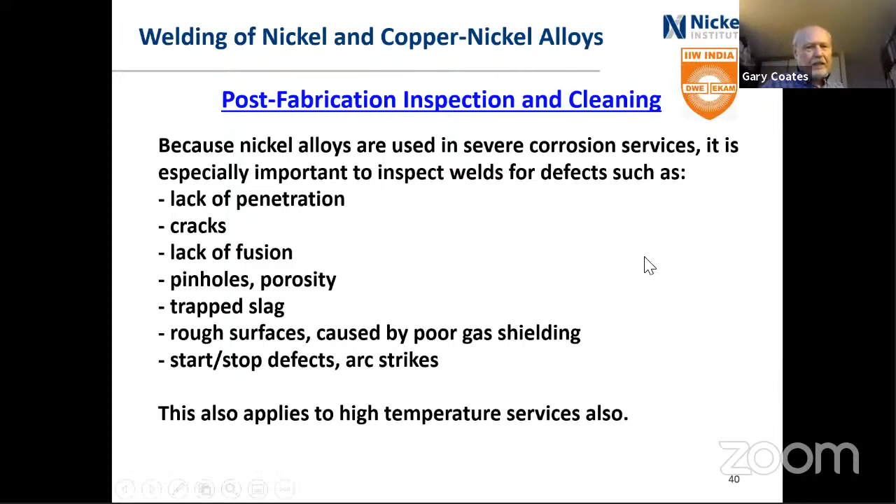And this also applies to high temperature services also. In high temperature, things get heated up and they expand, and then they contract as they cool down and heat up and expand again. So any type of surface defect can easily lead to cracking.

Now, one of the questions that comes up regularly is, because of high alloying content, do we need to pickle the heat tint from the welds? And the laboratory scientific answer is that no, you do not, because the services that most of these are going into will actually dissolve any heat tint, any chromium depleted zone beneath the heat tint.

So often they're removed only by a mechanical means, a stainless steel wire brush. However, because the equipment is expensive, your fabricator, your customer is paying a lot of money for this equipment, and they want to have it really look good. You want it to look good. So often they will put the pickling paste on the welds, and that does pickle away the heat tint. However, it really doesn't pickle the material underneath. Like with stainless steels, it will actually remove a layer of stainless steel, a few atoms worth of stainless steel. It doesn't actually do it with these chrome nickel moly alloys, the C alloys, but it makes it look good and more uniform in appearance.

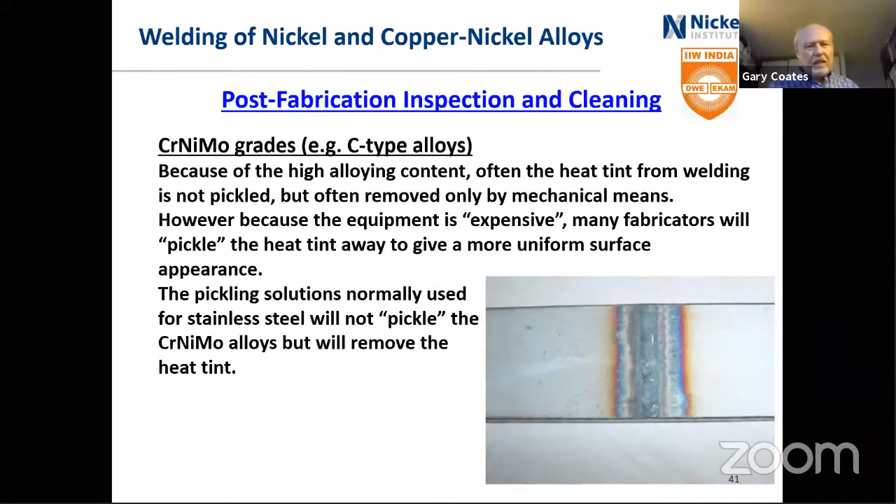So in summary, these fabrication processes can reduce the corrosion resistance of nickel alloys. We didn't talk about other things like forming, but that has an issue in itself. But it's important to know how to avoid the problems, because these are used in severe corrosion or high temperature services. You want to ensure the quality weldments are there, and that's a team effort with the welding engineer, even with the purchasing, your purchasing agent who buys the material. It's important that everybody get together and work as a team to ensure this.

The filler metal will often be dependent on the service environment. You can't just say, okay, well, I'm always going to use this filler metal for this base metal. It's not always working that way. The nickel alloys and copper nickel alloys are a diverse group of materials, with important differences between the different families.

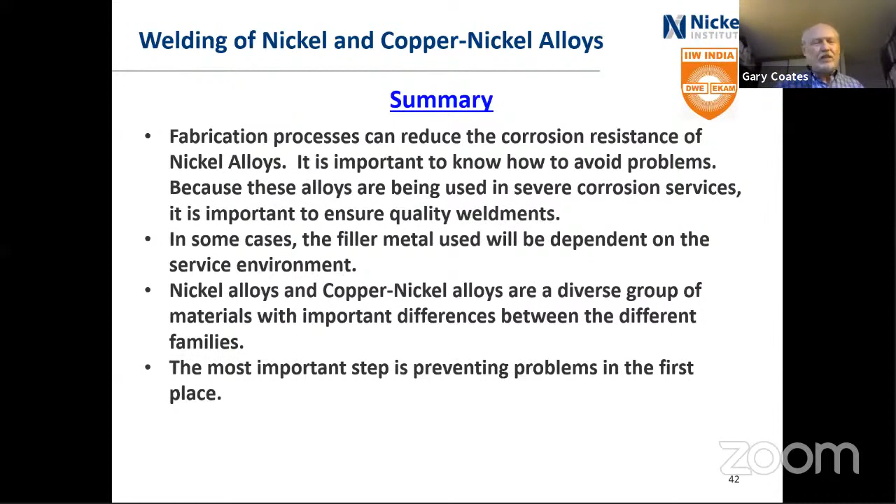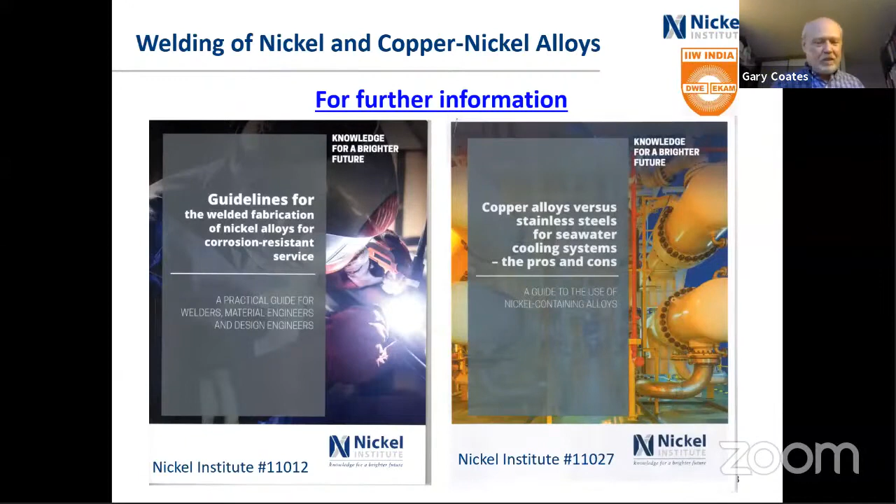And the most important step really is to prevent the problems in the first place, to do it right first. So we have a few publications that are available on our website free of charge. One is a newly revised guidelines for the welded fabrication of nickel alloys for corrosion resistant services. It's easiest to find on our website. If you use the number there, 11012, put that into the search engine, it will come right up. If you search on nickel alloys, you'll probably get 75 hits before you actually find the right one there, something we're working on.

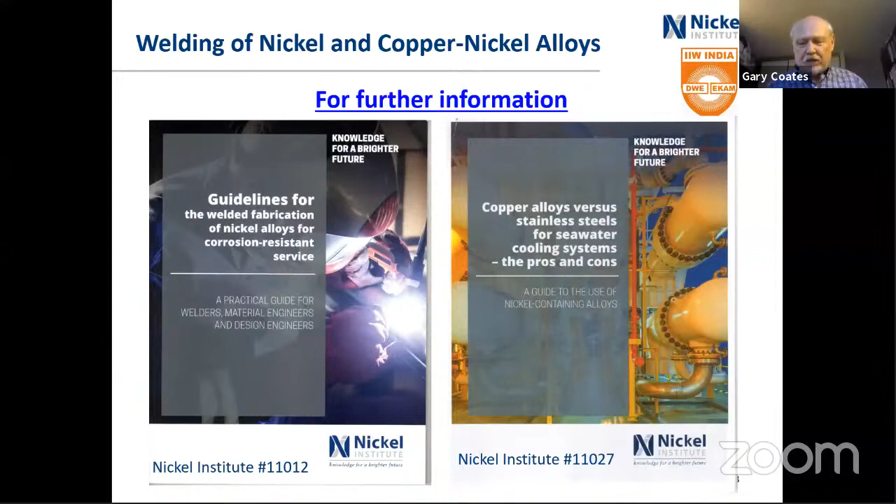A brand new resource we have relates to the use of copper alloys, the copper nickel alloys versus stainless steels for seawater cooling systems, written by Roger Francis out of the UK, a well-known expert in that area. We work together with the Copper Development Association on the copper nickel alloys. They have an excellent fabrication brochure available on our website as 12014, and it's also available on their website.

For the copper nickel alloys, there's a 5-part video series, about 10 minutes long each, covering very practical aspects of welding copper nickel alloys. If you search for that, they're excellently done. Our welding expert, now retired, was part of the group that did the video series.

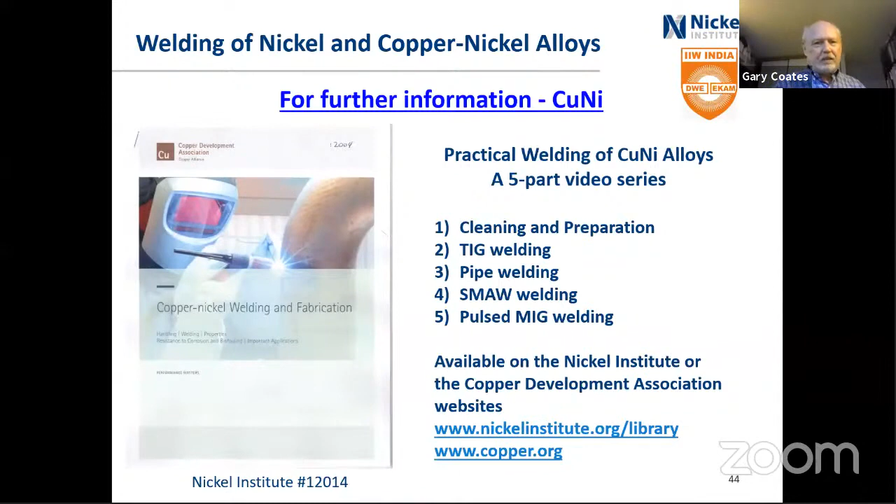Technical help is always available from our website, free of charge, and whatever the question is, it goes to the appropriate experts. We have maybe 15 experts around the world in different areas. So thank you.